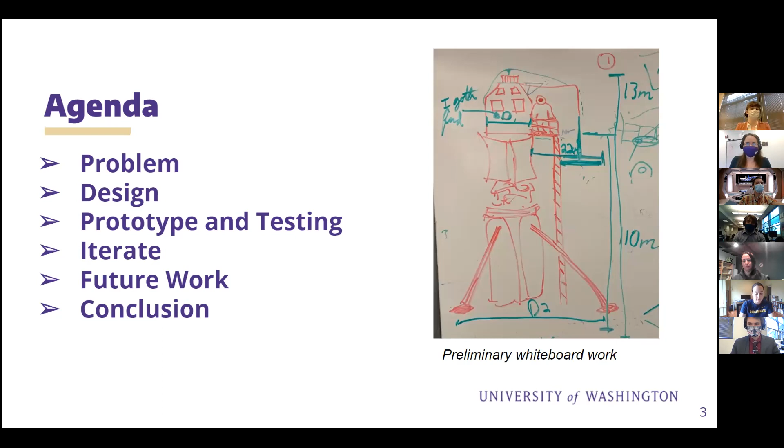The beauty of a ladder is that it's simple, reliable, lightweight. However, it's difficult to use. There's no buddy system, so if another astronaut is injured, it's difficult to get them back into the lander, or if there's a tear in a spacesuit or some other emergency, that makes the ladder a less viable option. Also, there's the inability to carry equipment up and down this ladder, so you have to access the equipment another way.

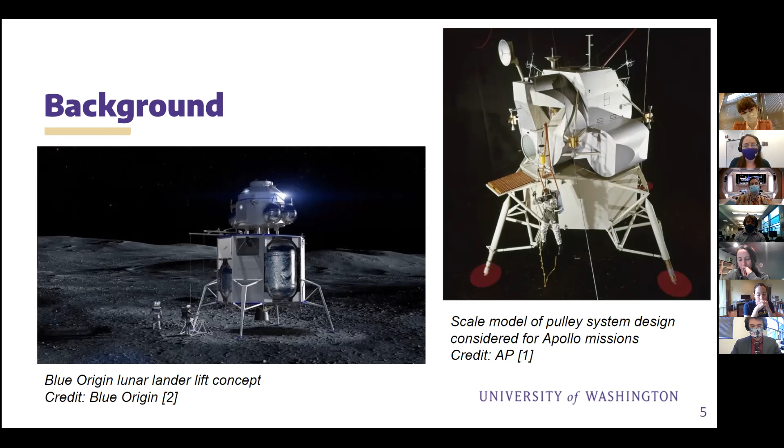Another pulley system would be what the Blue Origin lander is using here in this artist rendition. This was a concept used for equipment, but could also possibly lift humans. We came up with our own design strategy.

Some of the constraints we considered had to do with load requirements. We wanted to be able to lift two astronauts, each at 200 pounds. We heard from Sarah that each spacesuit is about 300 pounds, so we took that into consideration when designing for the load.

We also considered the whole weight of our entire system, along with the payload space inside the launch vehicle and the moon environment, with temperatures of negative 280 degrees Fahrenheit to 260 degrees Fahrenheit, as well as the possibility of landing on uneven terrain.

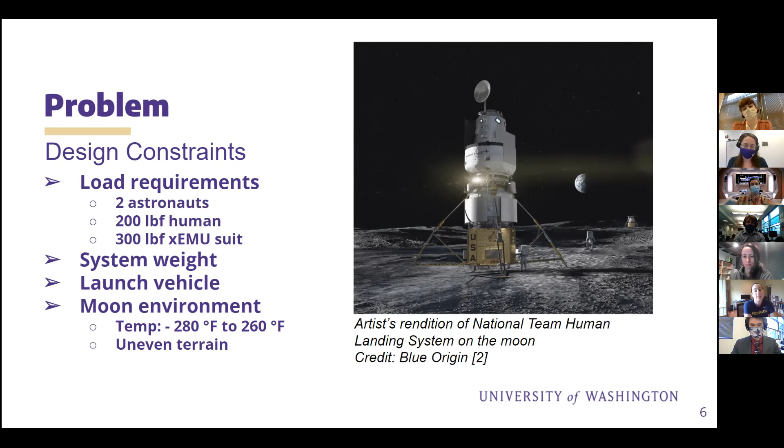So we went through and came up with what we needed to build, or need statements. The human factors we came up with were that we wanted the system to be safe, intuitive, and have a larger capacity than just climbing up a ladder or having enough space for one astronaut. We wanted it to be intuitive because we don't want a very complex system - we could just have arrows pointing up and down, causing the system to go up and down.

For the structure, we wanted it to be strong and lightweight. We wanted to use targeted weight reduction to make sure we're not having more weight than we need, as well as using exotic, strong, and lightweight materials to make sure it won't cost so much to get into space. We also want it to be very steady in terms of operations, with an emergency stop, multiple redundancies, and quicker ascent and descent than just climbing up and down a ladder.

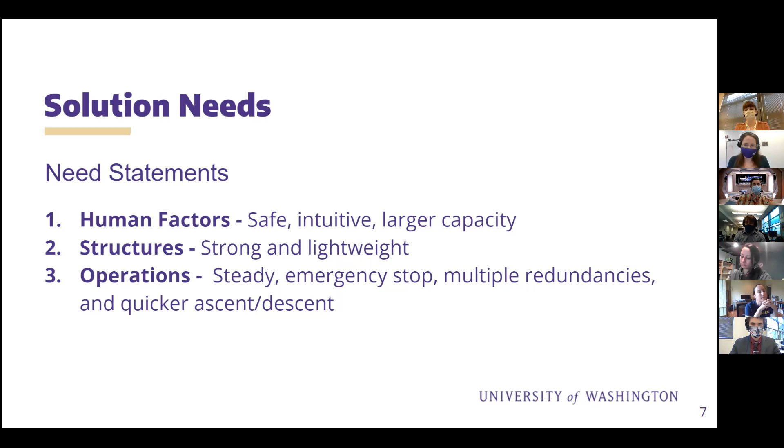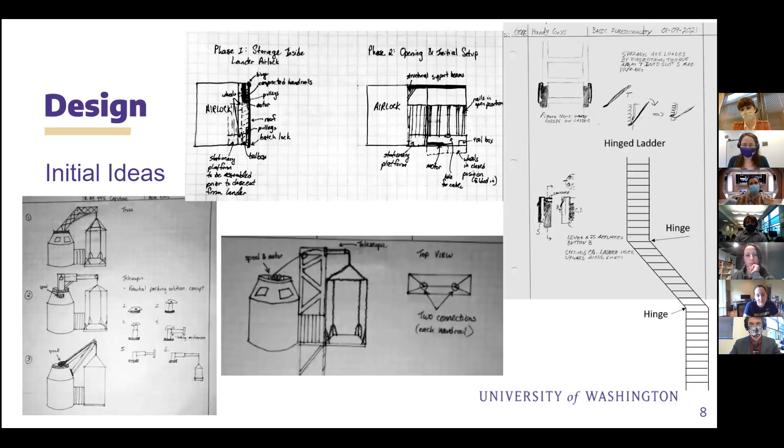We went through several initial design ideas, from a hinged ladder that an astronaut could ride up as it collapsed, to a linear induction motor system to bring it up, and even a ridiculous spring catapult. But we ended up on an elevator-like system with a winch pulling a platform.

The concept we landed on is similar to an elevator. However, the main design focuses are on weight reduction, and it is something that will only be semi-permanent infrastructure at this point. It's a basic system with a chamber that gives structural stability for the whole system, which holds the winch connected to the top hat, distributing the load down to the platform, guided by the guidance system to reduce translation and sway. It is designed to hold large equipment up to 453 kilograms, and the design is also compact and storable for transit and launch.

My subsystem was the winch. The winch is the powertrain of our lift system. Whatever it looks like, it needs to give power so we can bring the astronauts up and down from the lander without them having to physically use their own effort. We need it to be reliable, so it works all the time. It needs to be simple so they can fix it and there's less stuff to go wrong. And we want to reduce the load it has to carry—in other words, we don't want it to have to lift itself.

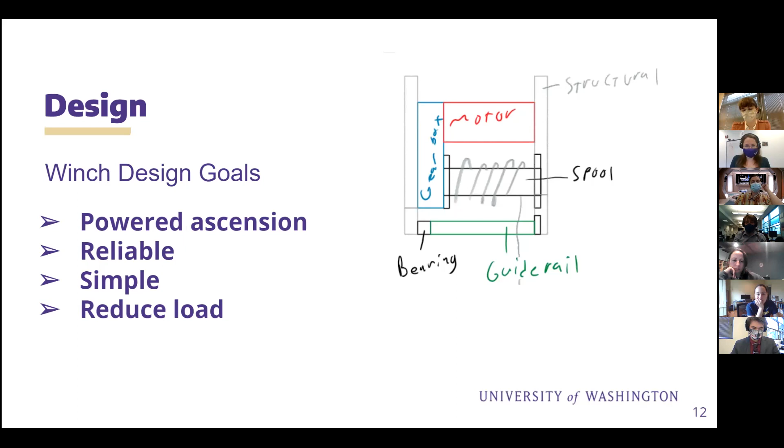We had to go through several calculations in order to spec out everything. Those are all listed there, and they are still ongoing to iterate and optimize everything.

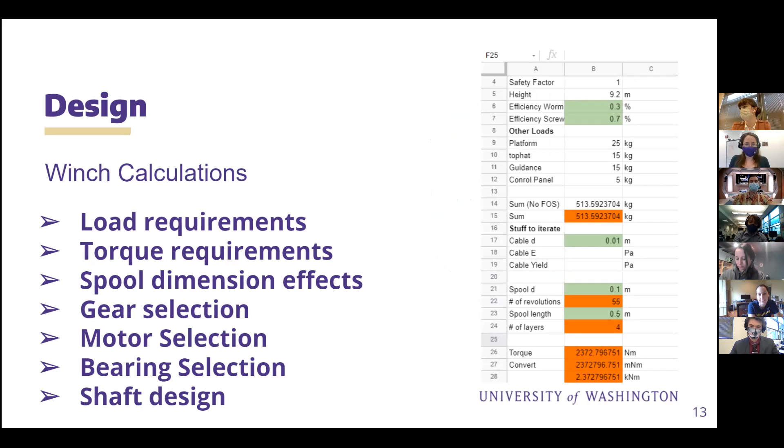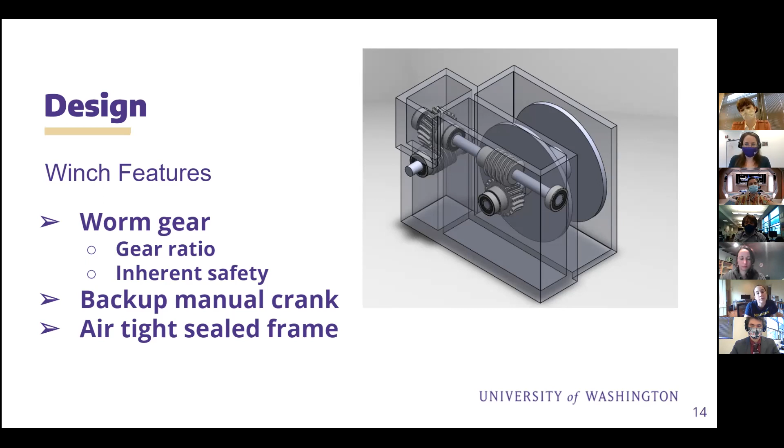The whole system is going to feature a gear train ratio using worm gears. They provide a good gear ratio in a very small area, and also provide inherent safety with one-way torque transfer. We want to add a backup crank so that if something goes wrong, you can attach a crank to, say, the motor shaft or directly onto the spool and wind it up manually. But if everything is tightly sealed, then it's not likely things should go wrong. The windows on the cupola on the space station are a great example.

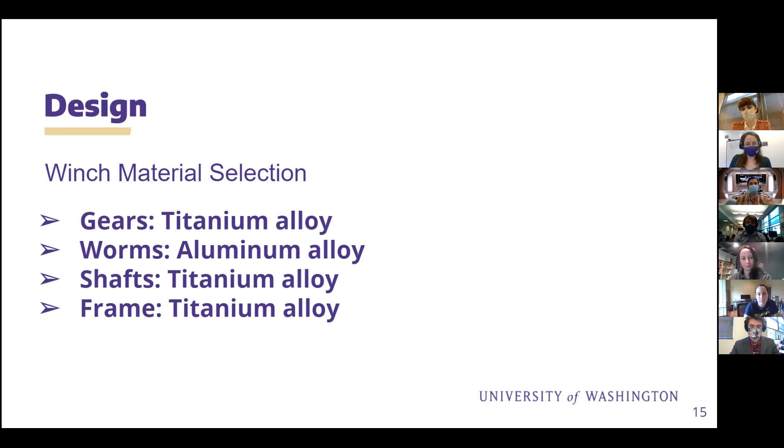Material selection is pretty early in this, but we have a few parts like the spool, the frame, the primary shaft, and the primary gear that are seeing all of the load, so those will need to be very strong, probably titanium alloy. We'll need a different material for the worms so that things don't gall and can slide.

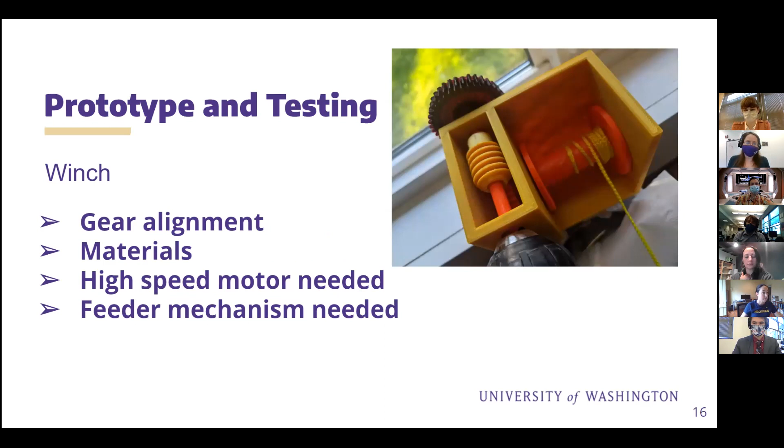I printed a small prototype which tested gear alignment, confirming we need two different materials for the worms and the gears. The gear ratio is so high that we'll need a very high-speed motor, and we'll need something to make sure the cable winds up evenly.

Future considerations include optimizing the gearbox frame to make it smaller and lighter, running FEA optimization on pretty much everything to reduce material where we don't need it, and building some sort of winding guide—probably a lead screw or something—to direct the cable onto the spool more consistently. Also a secondary locking mechanism in case something happens on the primary shaft between the spool and the cable.

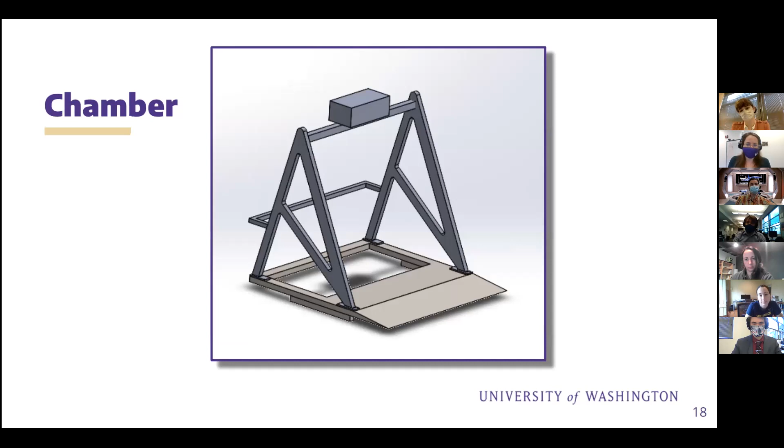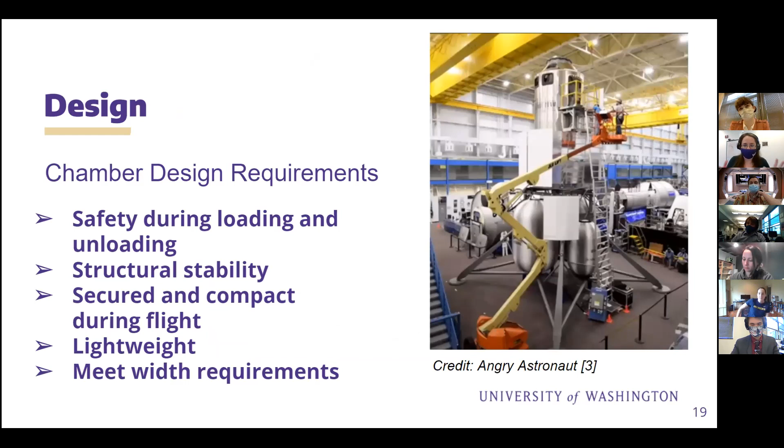This is the chamber. The chamber design requirements included safety during loading and unloading, structural stability, security, and compactness during flight. Also, the material would be as lightweight as possible, and we would need to meet the width requirements of being inside the launch vehicle.

The chamber design was broken down into five categories. We have the A-frame, shaped like an A to optimize load distribution, with rounded corners to prevent stress concentration. It is shaped so there's more mass on the side that acts as a counterweight to stay on the balcony of the lander. The deck has a ramp for safety, and it also has more mass on the balcony side to act as a counterweight.

The crossbar at the top is holding the winch, and we have a safety bar on the outside of the chamber. We can imagine that in a bulky spacesuit, when you're loading equipment, you might not be able to see where the edge is—that's why we have that bar there. And then also the slide rails at the bottom.

So this concept would be that in order to be compact during space flight and to keep the chamber inside the launch vehicle diameter, we would have it partially stored on top of the balcony. Then when the astronauts are ready for their first egress, they can push it out and it would lock into place so that the platform would be able to lower.

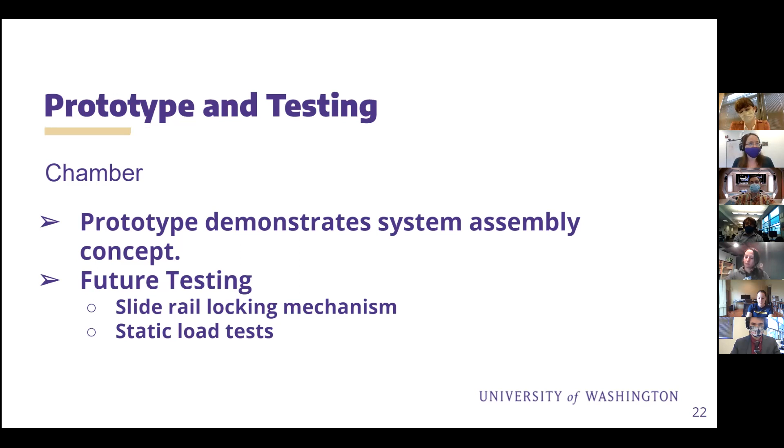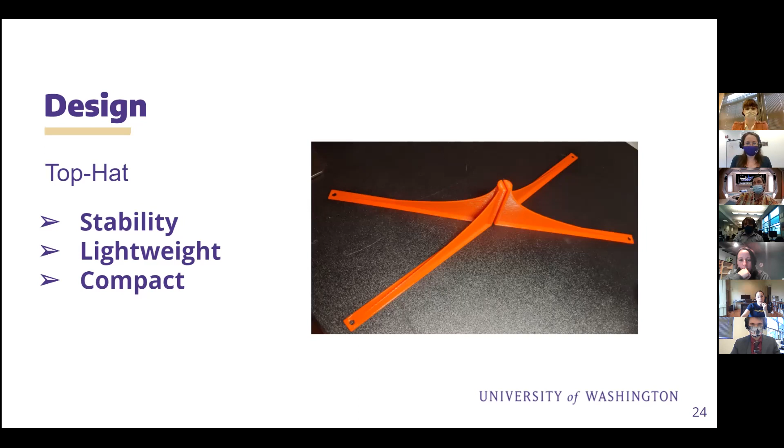Our system, which we are calling the top hat, is our method of translating a single cable into an equal load onto the platform. The main design considerations for the top hat were stability, to keep the platform on one level, and to keep it from translating side to side. It also needed to be lightweight and compact, so the final material selections are in the future. But the main design as far as lightweight at this point is the use of a T-beam like structure, with the vertical supports to support the vertical loads, and the horizontal supports to keep the individual arms from swaying.

In the initial prototype and testing, we printed a 1/20th scale and performed stability testing with that. It was obvious very early on that with just the 4 cables hanging down, there was a huge lack in stability. Putting cross cables on either side of the platform did reduce the translation significantly. However, it did cut off access to the platform for the equipment and astronauts. So in the 1/10 scale, we'll be looking at different cable configurations in order to continue to reduce the translation enough for the guidance system.

The next subsystem to consider is the platform. I started this by assuming a broad material, creating a structure, and iterating. The main design considerations to start with were something lightweight, something that can operate in the appropriate temperatures, as well as maintain sufficient strength and stiffness so that it will not overly deflect under load, and it will not yield.

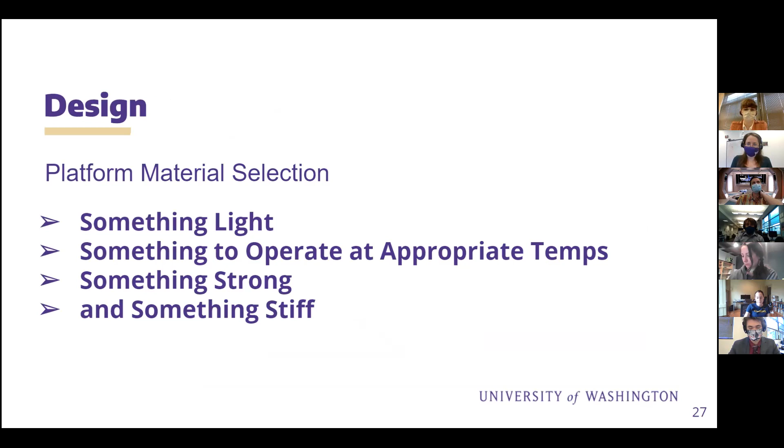In looking at some materials, we were able to eliminate several due to their inability to operate between negative 170 and 230 degrees Celsius. We eliminated beryllium alloys due to their inherent problems, including excessive cost and the fact that 50% of people who come in contact with it experience toxicity and can even die. Nickel and ferrous alloys were eliminated due to their high weight. That left us with three main groups to consider.

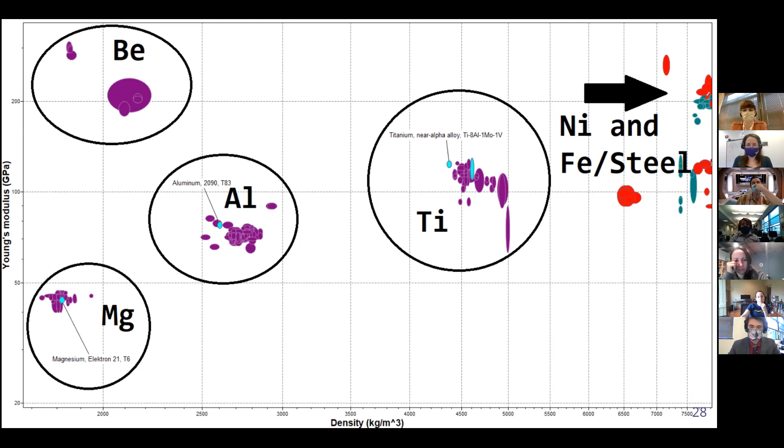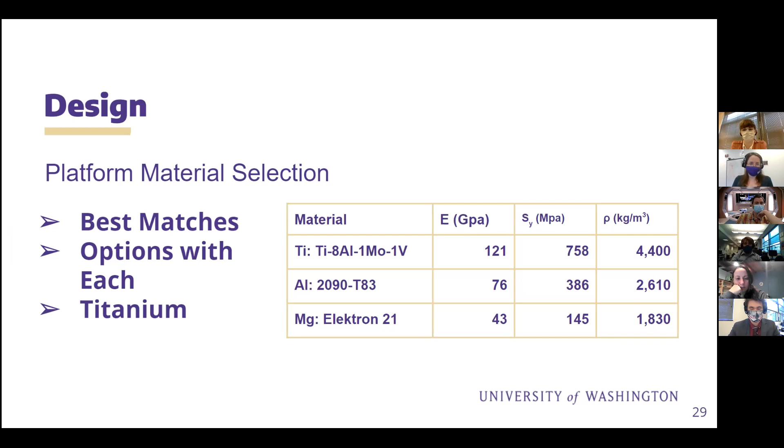Looking at our main groups of titanium, aluminum, and magnesium, we used other criteria to narrow down to one specific alloy from each group that matched a well-rounded selection based on our criteria. Those are seen here with some important values. Ultimately, we decided to carry the titanium alloy through the rest of the design because it is the stiffest and strongest, albeit heaviest.

The next step was to look at a basic structure. Keeping in mind that we wanted minimum weight while being able to support the load, a honeycomb structure was chosen due to its known ability to handle high loads with minimal material. On top of the honeycomb structure, we wanted as much empty space as possible. So a 150 millimeter radius circle was chosen as the base shape for our hexagons. That shape allows for minimal material, while at the same time not sacrificing stiffness and not being too big that one might step through the hole.

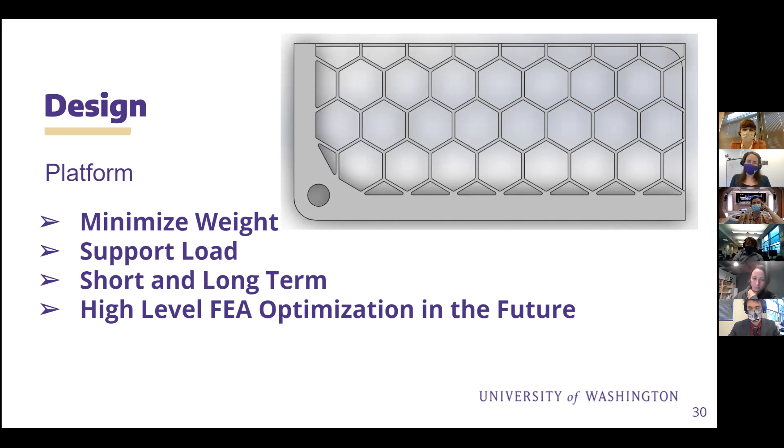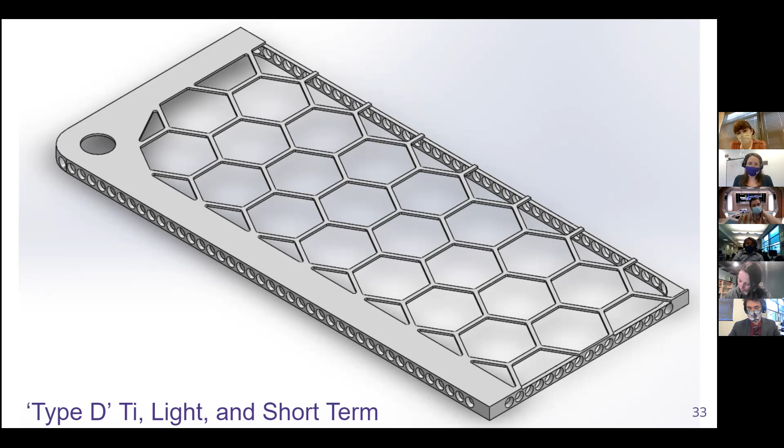Here we can see an isometric view of the short-term life platform to be made from titanium. It will be very light and it will get the job done on the moon.

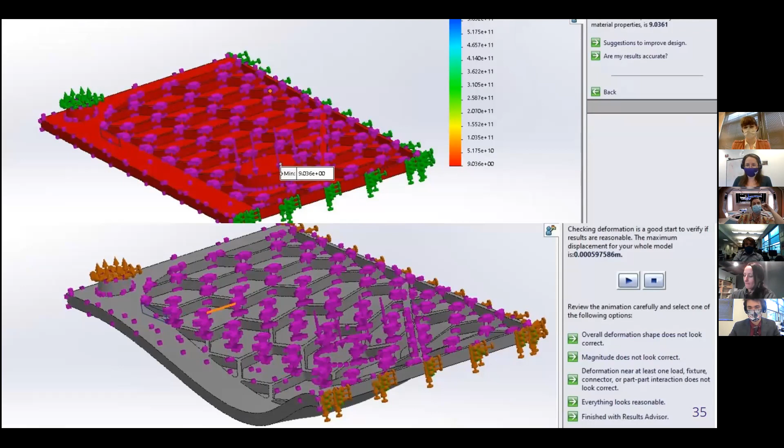We can also look at a more long-term version where this is significantly heavier, although it is also stiffer, made from aluminum. This is something that can support higher loads and could potentially be used on other missions, such as a Mars mission. Some quick FEA looking at standard loading conditions proves out what I just said, that this is much stronger, while at the same time experiencing less deflection for more long-term or heavier loading scenarios.

Some upcoming tests include a deflection and strength test on a titanium specimen, as well as some integrated functionality with our 1/10 prototype, as well as our full prototype.

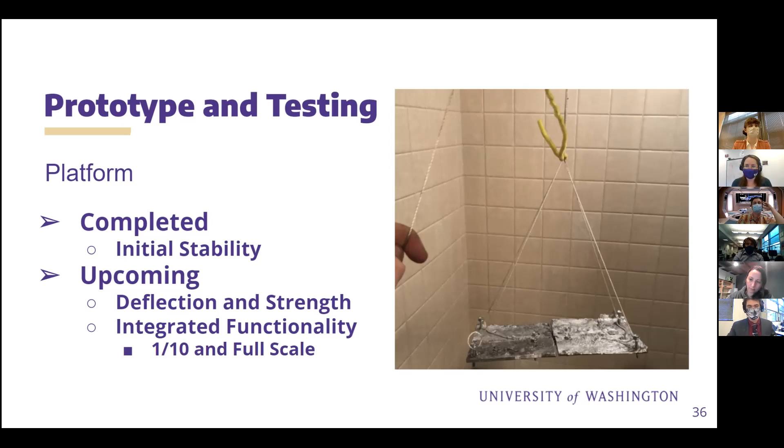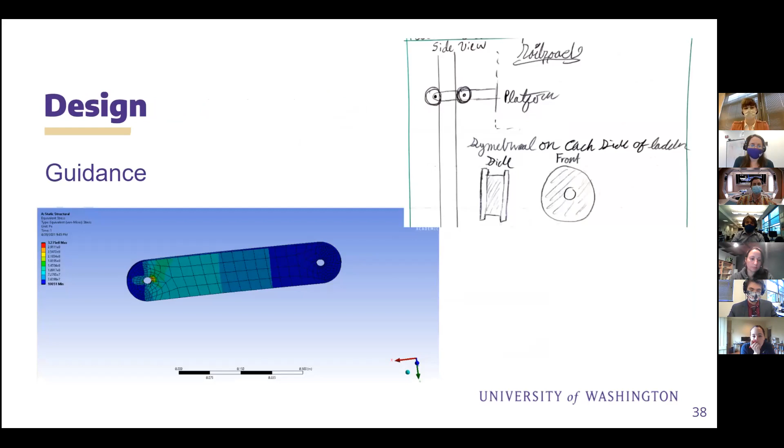After prototyping and testing, I came up with a new iteration. This is more similar to the final design here, as you can see in the upper right-hand corner.

I came up with a smaller and more robust design that had shoulders in it that will better hold the bearings in place. I also increased the distance between here, the distance on the spool itself.

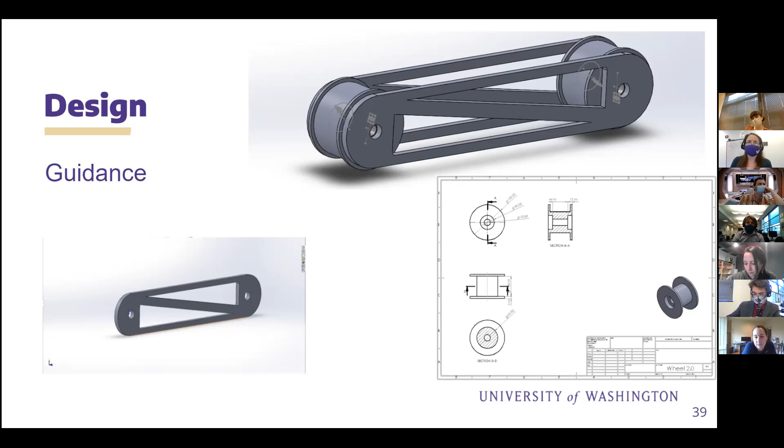I also came up with where most of the forces will be translated through, and I found that it would be translated through the bearing. So I went with a bearing selection that would be able to handle all those transverse loads. I came up with the fit for the bearings, which would be on the outer, it would be a friction fit, and the inner would be a slip fit.

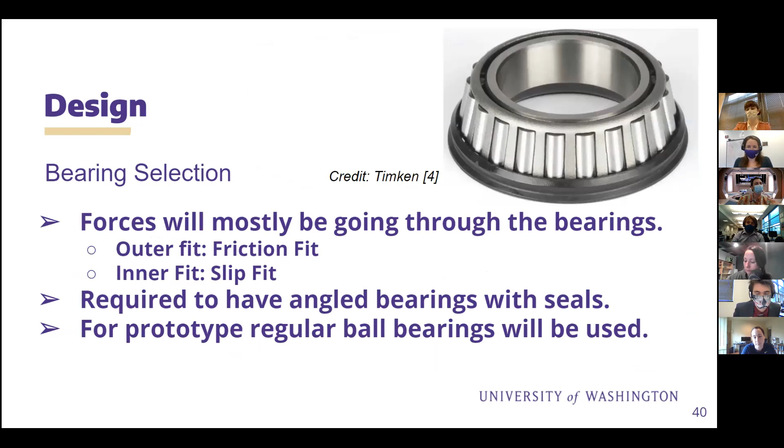Next, I designed the shaft that would be connecting my guidance system to the platform. The shaft has a shoulder that will press on the outer side of the bearing, sorry, the inner side of the bearing. That's static, it doesn't rotate.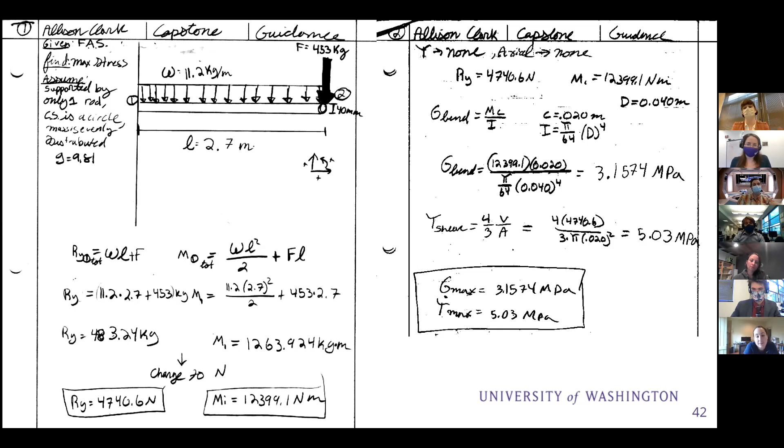On the other side, it will hold together using a nut. I also took calculations and found the worst case scenario, a very rough estimation of what the shaft would be feeling.

Here is my final wheel prototype, zoomed in for you.

So what I have completed on the guidance system: I found the load stress points and found new ways to improve the wheel. My upcoming work will be the connector first prototype, the second wheel iteration test, and I will be talking with Collins about how we are going to connect the platform to the guidance system, and I will be making a more specific material selection.

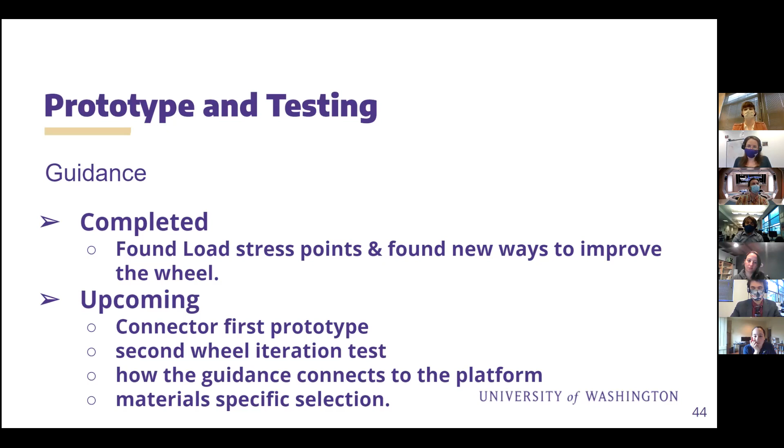The user interface will be a simple button panel accessible both to the users on the platform itself and at the top of the rocket. It just needs to have a couple buttons to move the platform up and down, as well as an emergency stop to connect or disconnect the power.

They also need to be able to find these buttons in a low visibility situation. The buttons are simply going to complete a circuit if you're holding down the button, and disconnect the circuit if you're not holding down the button, for maximum safety and control. And then the emergency stop will also disconnect the power.

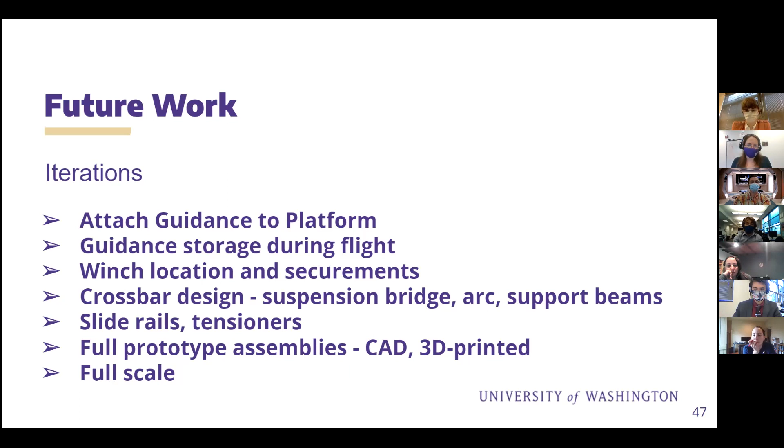The future work will be attaching our parts together. We'll be figuring out how to store the guidance system and the platform in flight. We'll try and optimize the winch location if it's going to go on top of the chamber, perhaps in the rocket. We'll optimize the crossbar design on the chamber to figure out how to reduce loads on it. We'll also figure out the slide rails for that, how to get it to extend and compress back when in flight. The full prototype we will be assembling, and then we'll complete our full-scale prototype and test that.

In future work, we can see this project expanding in functionality. For example, what if we had the platform be detachable and connected to an LRV trailer? Or what if we could incorporate a forced gas system for regolith mitigation on the chamber, so that as astronauts are coming up into the lander, they can remove a lot of that pesky moon dust. Also, it would be great if we could have a system for tool and emergency kit storage, along with counterweights, manually powered, a redundancy system for the winch, along with designing our system for other missions such as Mars.

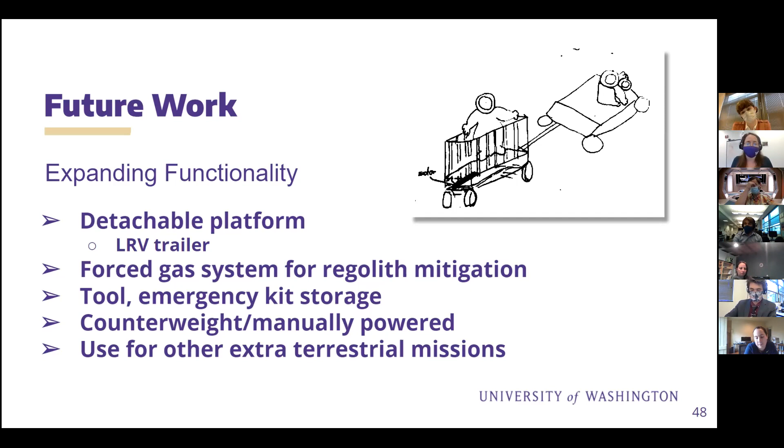Risk points that we're looking at: how to detach the platform if we are just unable to get the thing to move. The forced gas system that was mentioned, we'll need to come up with some backup systems there. We'll need some emergency kit storage since some of the tools are going to be too heavy to move. We'll need to figure out how to do the counterweight if the winch fails. And figure out, if we're on other missions, what other stuff could break.

Does anyone have any questions for us?

I have a few, but other people can go first if they want. Looks like it's just you and Dr. Hanachi. Okay, I have a few questions, I guess, of things I think you touched on a little bit, but maybe you can elaborate on.

Are there concerns, and I think you talked a little bit about a hammer test on your initial prototype, are there concerns with if the weight is off center on the platform? So say you've got one crew member riding up and down, sitting next to a cart of tools, and so the center of mass is skewed to one side or the other. Have you looked at that?

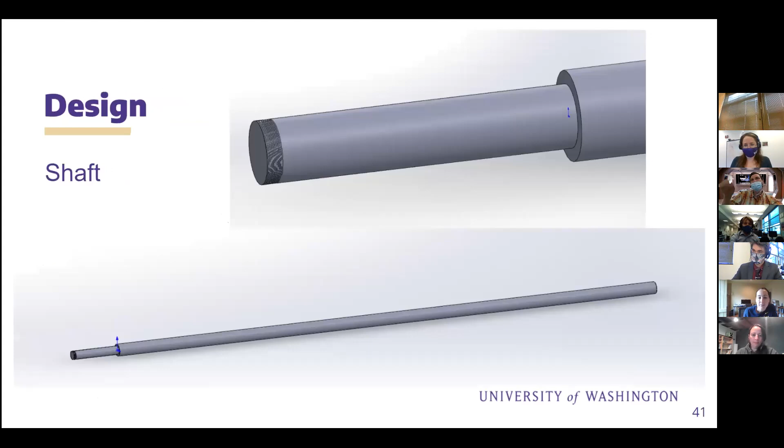Yeah, okay, go ahead, Sarah. I'll ask after you. But go ahead, because I had a related but tangential question.

Actually, related to that, I would like to see, if you have it, a recording of the testing, that can give us an idea of how you do it. I would like to see different scenarios and how things go, and see the stability that's translated with the improvement that you made. Also, I'm glad that you took pictures, and because I saw this before, I think I can tell that there is a string and I know where they are. But if, when you're recording the video, you could use different colors of the string, or just make it a little bit easier to see, that'd be great.

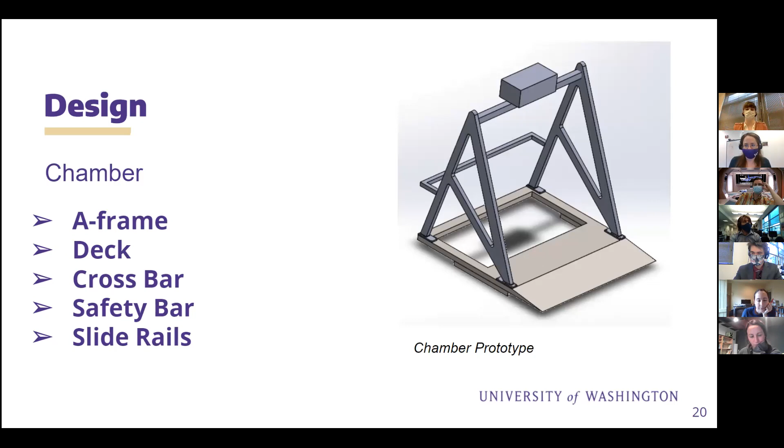...and then once the platform is on the surface, they would go out the same direction. The bar that you see there is actually on top, it doesn't go down with the platform. This is the portion that is stationary at the top. Yeah, that's the chamber at top.

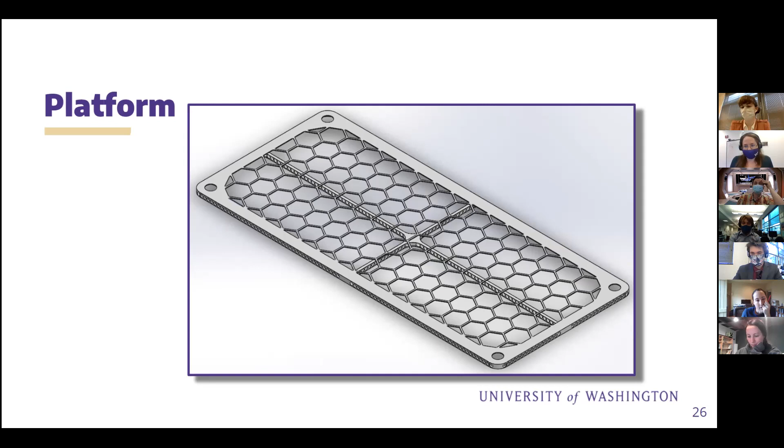Okay, where's the figure of the platform that lowers and raises? This guy. We're still looking into a mechanism that the astronauts can link their harnesses onto, so we'll have another safety bar there. The image we were just looking at, I think I passed it already. This is actually still probably a better rendition of what we've got so far.

But we'll have some sort of bar or something that they can link onto. It'll be pretty open on most sides with perhaps a cable running around. We were also looking at having their links come from the top itself, like an umbilical cord, and they could link onto it there.

Yeah, I think it's a key thing to communicate a little stronger, kind of the con ops for this. Pictures showing here's the configuration as the crew's getting out of the lander into this thing, here's the configuration going down, here's the configuration on the ground where they egress off of it, would help a lot to visualize more clearly in this presentation. Because looking at this, it seems like you'd have cabling on two sides and cross beams in the back, and the front is totally open - I'm having a hard time visualizing what it looks like in those various phases. I'm sure you've thought it through, but just try to communicate it a little clearer.

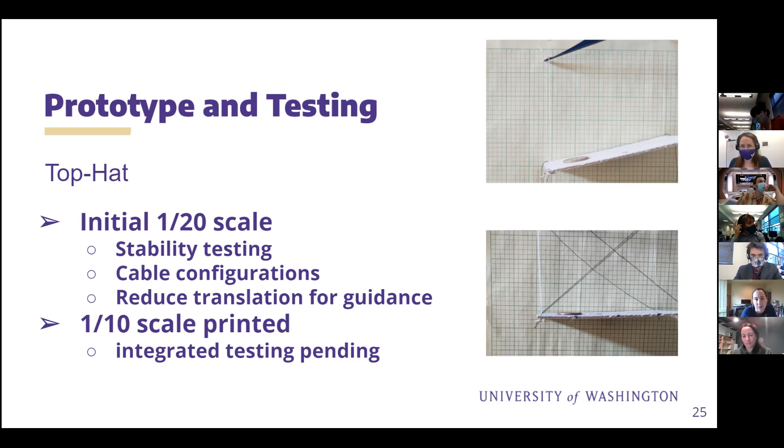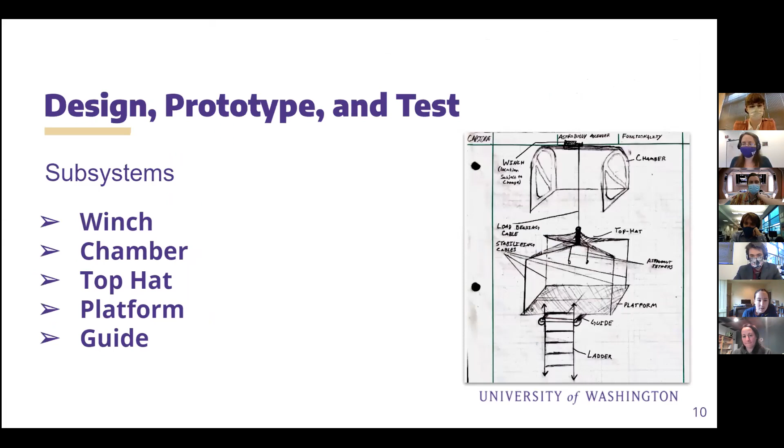Absolutely, we can make some assemblies that show everything integrated together as well. Yeah, even a hand sketch would go a long way. All right, yeah, this guy. Yeah, there you go, that's okay. Let's look at this for a second. So there's your platform, there's your cabling in the corner with your top hat.

Then you're picturing a tether of some sort. So if you were to take up and down tool carts or boxes of rocks or something, think about how that would be stabilized on the thing and attached, so there's no risk of it rolling off or falling off or anything like that.

At the moment, what we've looked at in terms of carts is that if they have legs, they can set into the holes in the platform, which would be large enough for that. However, we are also considering other alternatives, including latches that we will be delving more into in future work.

Okay, because we're envisioning having for all the Artemis missions some sort of rolling cart that the crew can pull - I can't tell you exactly what it looks like. I could see it being convenient for them to load that thing on this platform and bring it up and down to unload it. So just make sure you can accommodate a variety of different things like that.

You have a good point about demonstrating the different configurations, so we will include that in our final presentation.

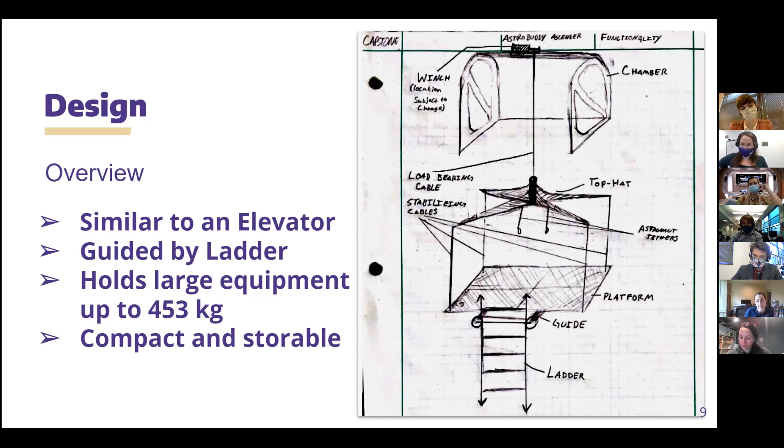Professor Hanachi, did you have a question for us? Yes, thank you. You mentioned some safety values, and that you managed to—if you can go back to that slide, please. What's the highest value there?

Okay, good. Good job, guys, this really addressed some of my questions. This is really good. I guess my only other question—you talked about your top risks for your future or enhanced capabilities.

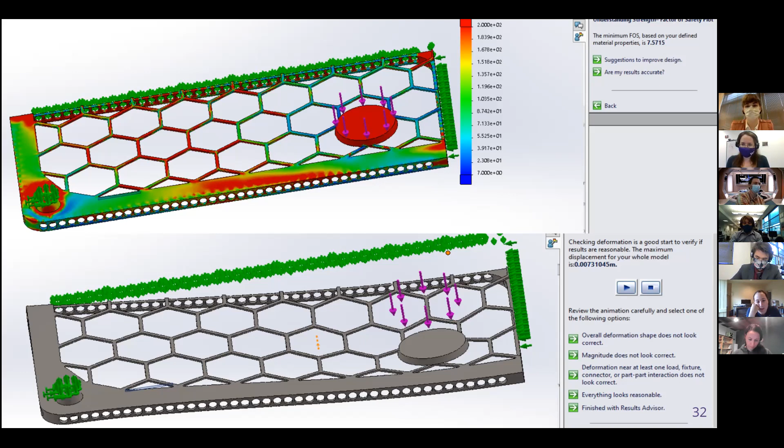What are you tracking as your top risks for your baseline capability?

We've got a number of different things we're considering. We're looking at building in ways to have a backup. We've already talked about the ladder, so we want to have a ladder in case everything fails, you've still got that manual backup. We want a manual backup for moving the platform with a physical crank if the motor fails. The worm gear system allows us to only move the platform when we want to. We've been talking about other ways to eject systems if stuff completely fails, and most of them involve breaking the top hat off of the cable, so we can just drop the platform and be like, well, bummer.

Maybe share my screen. Jacob, I have it up. Oh, stop sharing, stop sharing, please. Yes.

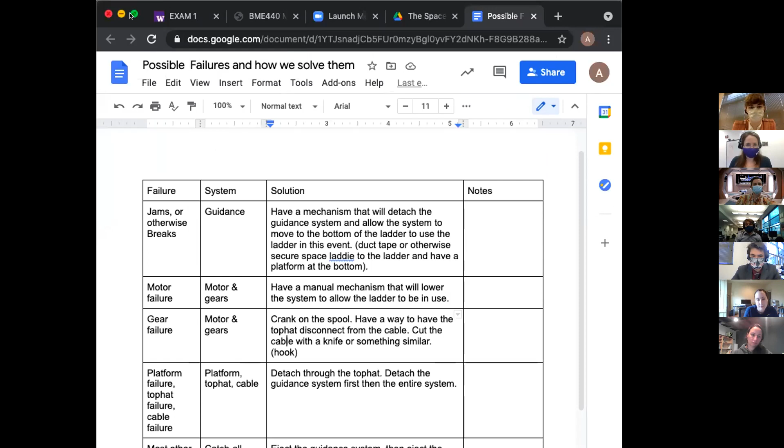So we have started a document, as you can see here, of the possible failures of the system. Like Jacob said, most of them involve detaching the whole system and basically using the ladder as our main backup. But we also have, if something such as the guidance fails—platform failure, top hat failure, and cable failure—we would detach the top hat. If there's a gear failure, we would use a manual crank, like Jacob said. We are definitely thinking about ways to make sure the whole system is in use, but we also want to make sure that if it doesn't work, we don't want anyone using it.

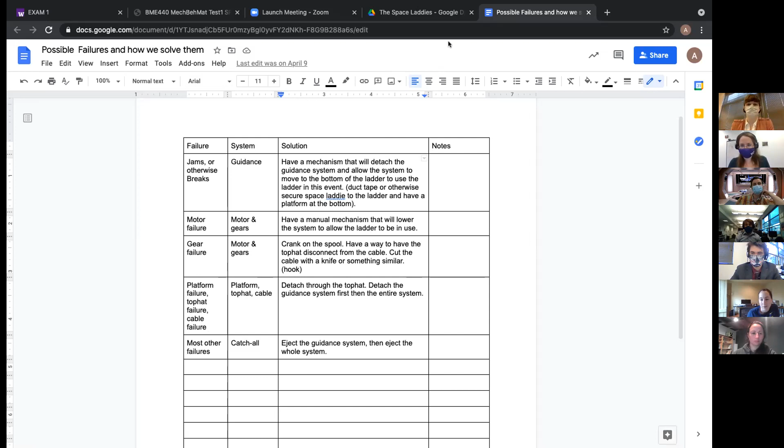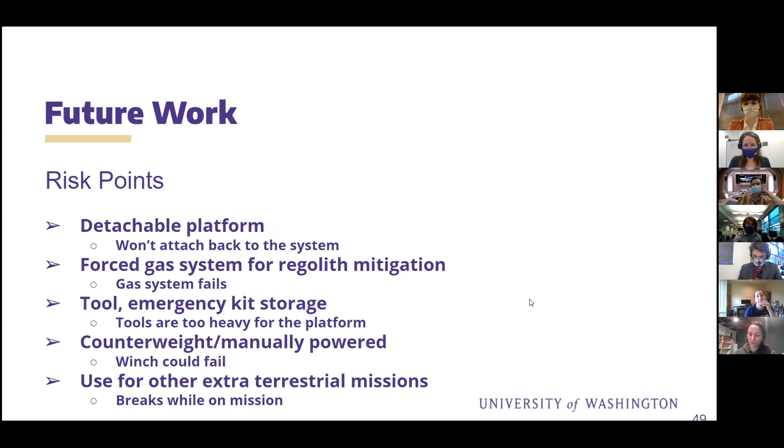Okay, good. This is good. One last question for me. I have—so the user interface that you referred to, can you speak more about that, or your plans about it? Yeah, this one. Thank you.

It's pretty simple. It's just a few buttons that will connect or disconnect a circuit from running the power through the motor one way or the other. We just want the astronauts to have a really easy button that's reliable to use, easy to find.

And do you have—is it an actuator? Did I hear an actuator, or is that going to be a screen? These buttons would be physical buttons, ideally something you'd even be able to feel through big bulky space gloves—something that you can find and operate in low visibility.

And I imagine this is something for future work. Okay, yeah, I think the design is simple, which I like. Did you say you can also control it from inside the lander? So if you just wanted to send down rocks or something, but not have a crew actually ride it down? That would be ideal. Inevitably, there's nothing to stop us from making ground control able to control this thing either. Just ideally, we would want a very safe mechanism with all the same backups you get in a regular industrial setting.

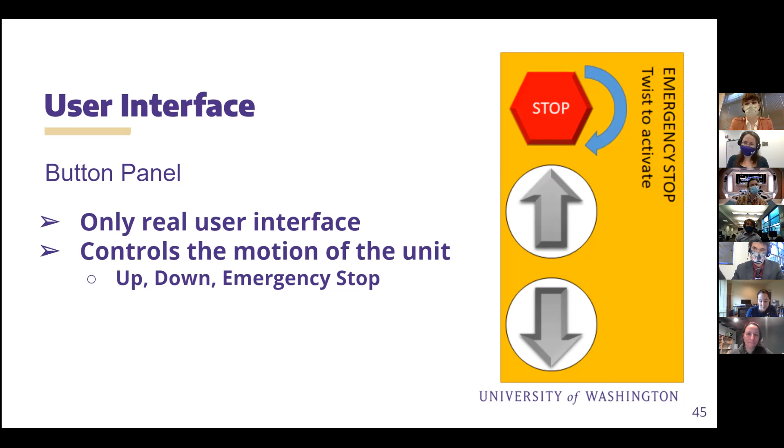Agree. Yeah, once this works, I'm sure they can make it more elaborate. The spirits of MVP. Sarah, you were going to say something? No, I was just saying it's in the spirit of MVP.

Are there any more questions? Not for me. No, it's very good.

Thank you. In conclusion, we talked about a problem we found where ladders are light and simple, but fail to be sufficiently safe and efficient as the primary method of ascending and descending in tall structures in space environments. For our solution, we are proposing an elevator style apparatus with much higher load capacity than a simple ladder, while remaining lightweight and easy and intuitive to use.

Our future work includes some high-level FEA optimization and some different features, such as a trailer for a lunar roving vehicle, tool storage, and reusability.

We had some questions today regarding whether we looked at off-center loading, which we did, and we have cable orientation as a great way to mitigate that. We were asked about the chamber, which will have the open side be where the astronauts load and unload, and the chamber itself will not descend.

We will work on getting some better renderings of the system in use at different points to further illustrate that. We'll also include some renderings of how a rolling cart may be able to be loaded and unloaded. Our mass—we were asked about—we have a reasonable estimate for it. It's a little high right now, and our actual values are lower.

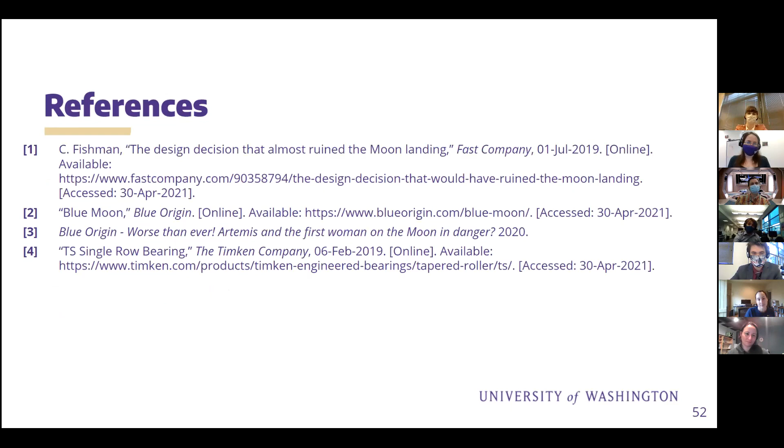We appreciate all input and everything. Good job. Good job summarizing also the questions.

Collins and everyone, I wonder if, on the questions addressed, whether you're going to give a picture of the whole system together assembled. I know you plan on the 3D printing piece. Okay, fantastic. Absolutely. Awesome. Yeah, very professional presentation.

Sarah, I don't know if you'd like to add anything or have questions for them. No, it was very good. I'm impressed with what you've done since we last talked, and yeah, agree. I think just keeping in mind it's always good to help the receiver of this information visualize how it's going to be used at all different phases. But otherwise, yeah, I thought it was very thorough, very well done.

Thank you. Thank you. Thank you. Terrific. Good. That's a good practice.